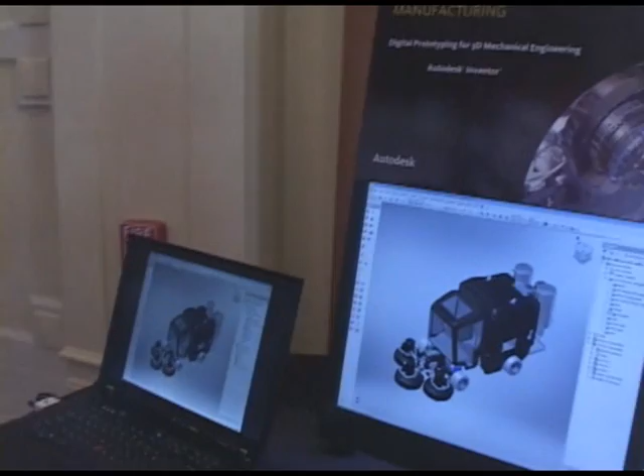Hi, my name's Garen Gardner, and today we're in San Francisco at the World Press event, and we're going to talk a little bit about Inventor, some of the new enhancements. Three of the main things that I'm talking about today are large assemblies, some of our new sheet metal enhancements, and then also being able to do some additional tools with our Drawing Manager tools.

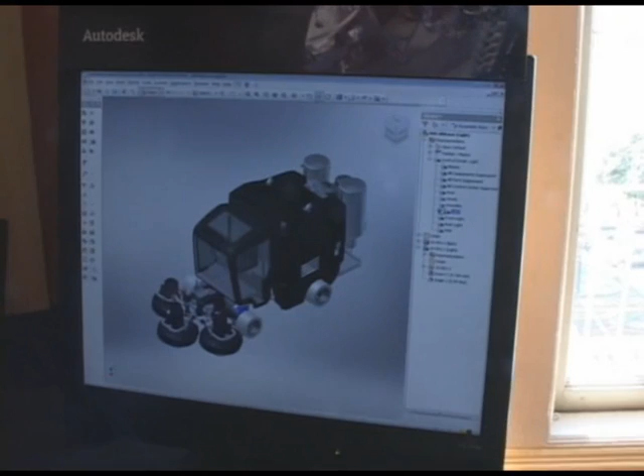So let's take a look at some of the large assembly capabilities. You'll notice first off that we're loading up an assembly that has about 340 components. However, we can lighten this up quite a bit. If we just want to load it up, we want to take a look at what the design looks like, but maybe we don't want to dynamically load every component in my assembly.

Well, in this case, I can substitute a lot of these components for one or two particular components. So you'll notice that I basically have broken each of these down to a couple of different components, and now I only have four parts in my assembly. So this allows us to really create huge assemblies and be able to take advantage of a lot of the power behind Inventor. Now you may wonder how we're able to accomplish some of these things.

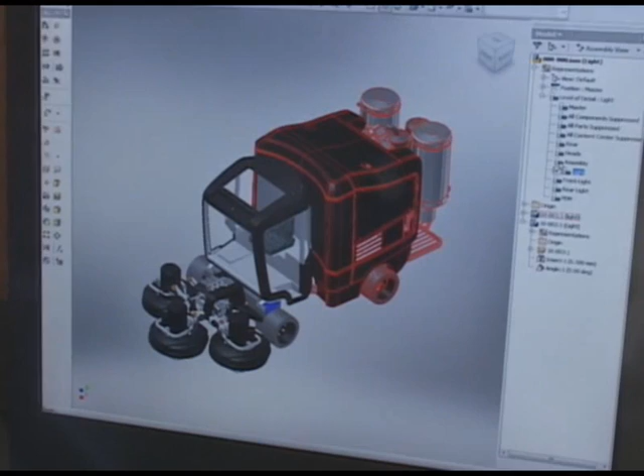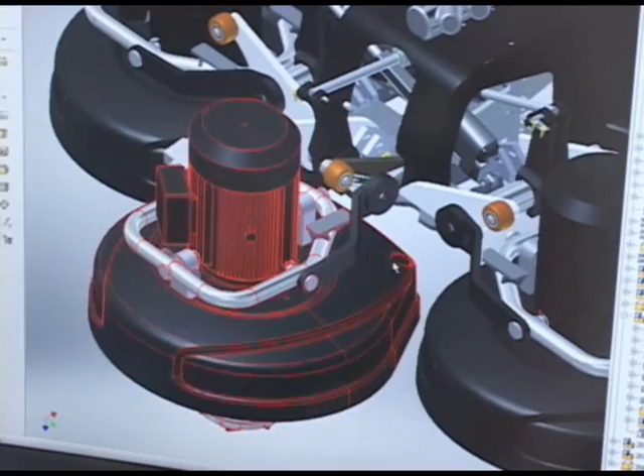The first thing that we'll do, we'll take a look at the front polishing heads, and we want to be able to simplify those. So we'll actually grab that front assembly and take a look at it. Now this particular front assembly has about 218 components in it, and we want to drop it down to about half the amount of components. So let's just open it up in its own window. You'll notice that we have each of these polishing heads, and these are really the area that we want to simplify or reduce some of the overhead.

So with this particular component, I can simply come in, create a new substitute. Now I have a couple of different options. I can create a new part manually and swap it in, or I can let the system help me out and simplify this particular design. So you'll notice as I'm doing this down at the bottom, we've removed 32 components down to one, and this being an occurrence of 3, we can actually remove about 100 components in my assembly just by making a real quick substitute for this part.

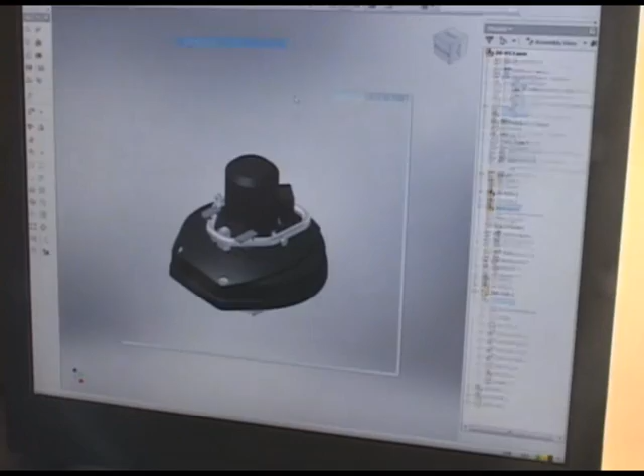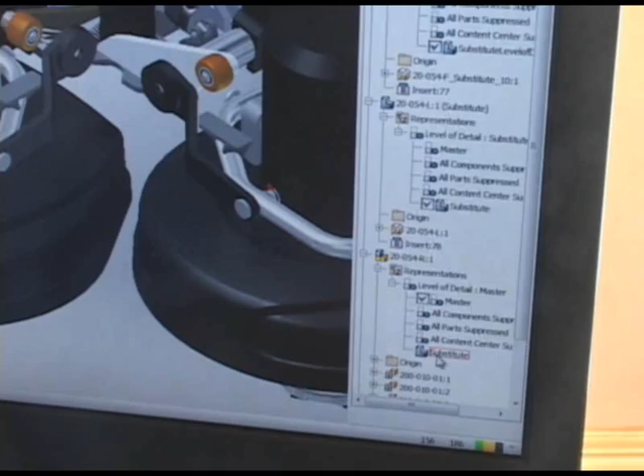Now from a high level, it doesn't really change my design at all. I still have the same weight, the same information in my assembly, but I'm able to easily load up this assembly with a lighter weight representation. So you'll notice as I dynamically remove some of this from memory, we'll see it go down to 188 components from 218, and then we'll just do the same thing on each of the other occurrences. You can see it drop down to 156, and then finally with our third one, we'll drop down to about 124. So we started out with 218 components, we're down to 124.

So you can imagine opening this up with half the amount of the components, we can do a lot more with it. And imagine this on a grand scale, maybe a shop floor that has hundreds of machines. You're trying to see how they all work together. You could substitute each of the machines and really lighten it up.

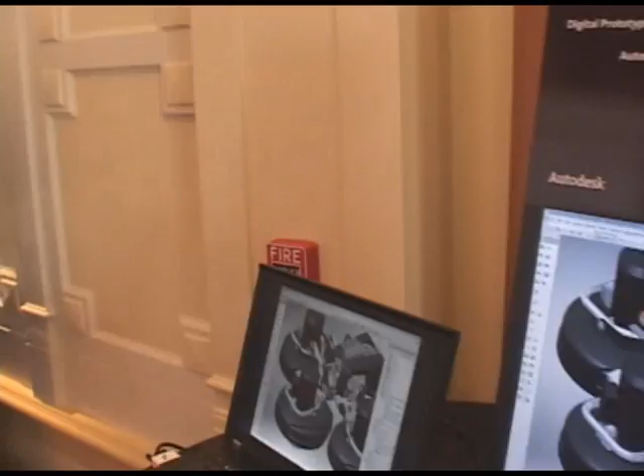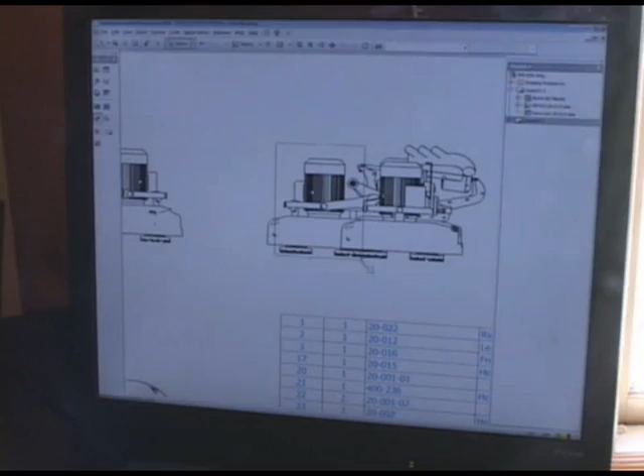So one of the other areas that we've added some nice enhancements is the ability in the Drawing Manager to really create more complex, detailed drawings. And many of our customers are wanting to be able to simplify. They've wanted to take something like this particular view and crop out some of the information. So you'll notice that we have a crop tool, and I can just window around the area of information that I want to keep and have it crop everything else out that I'm not really that interested in.

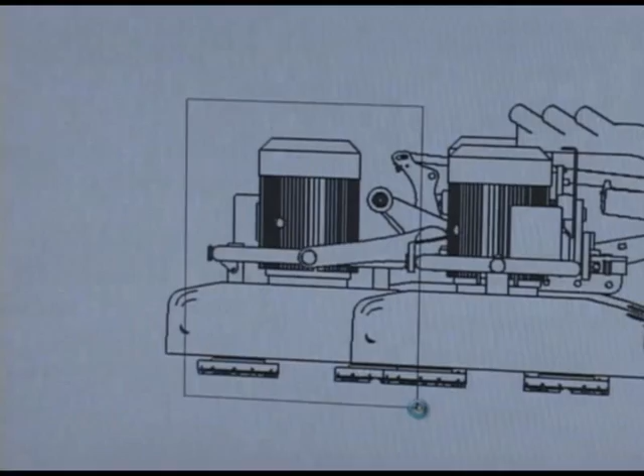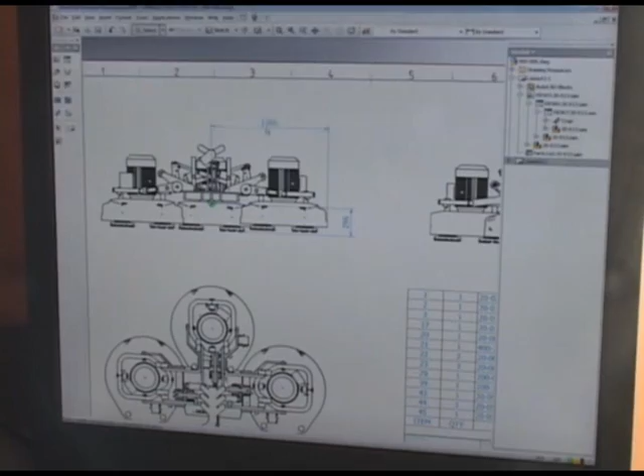I also may want to see what the center of gravity of this particular design is. So oftentimes you want to be able to create various center of gravity points and dimension to them. So one of the things that we did in Inventor 2009 is added the ability to turn on a center of gravity. So not only can we see this in the actual 3D model, but we can dimension to it in the 2D drawing. This is completely associative, so as my 3D model changes, it'll update my dimensions, telling me where the center of gravity is for this particular component.

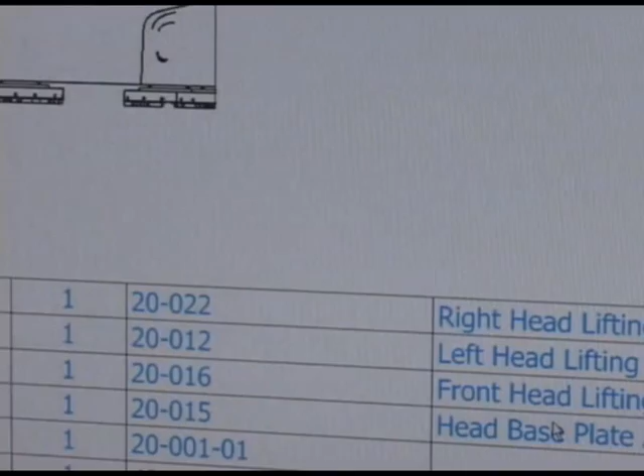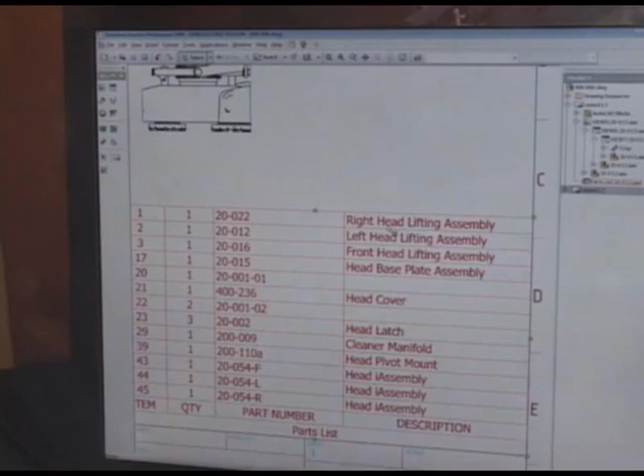And then finally, one of the other enhancements that we have in the drawing environment is being able to really clean up your parts list based on how you want it to look. Many of our customers used AutoCAD in the past to do a lot of their parts list, and it was a very manual, laborious process. Through Inventor, this is a much faster process. However, it's oftentimes necessary to really simplify or clean up what's in the parts list for any given view.

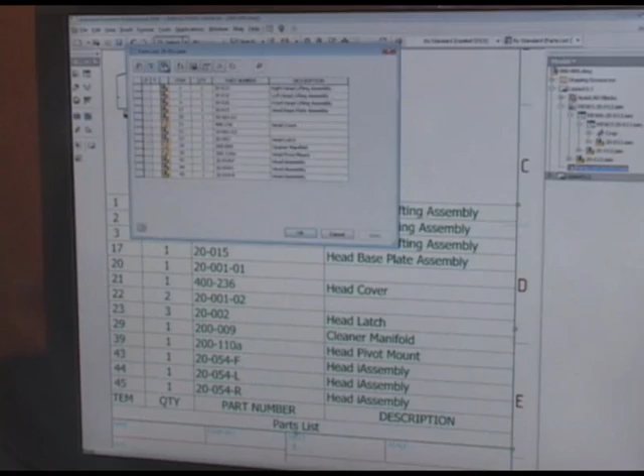In this case, we can go into some of our filtering tools, and we can just tell it that we don't necessarily want to see any standard parts, so these would be nuts, bolts, or washers in my parts list. We may want to put that off on another sheet shortly. And we also want to only see various components that are in my working components. So these are all the actuators and all the working components of my design. And we're going to add those.

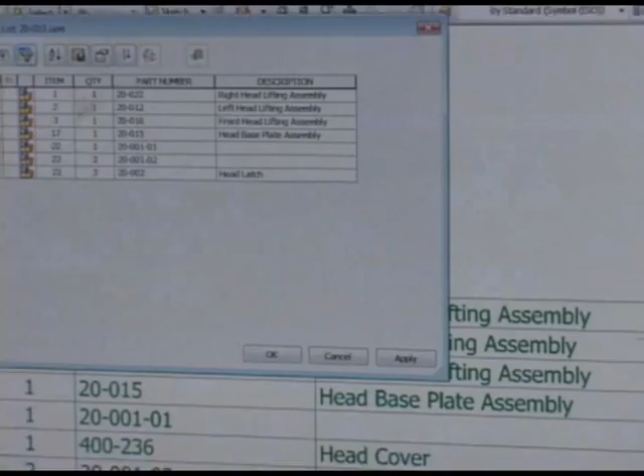So I can have multiple things go into my filter. You'll notice that it drops down my parts list by about half. So I'm really able to easily filter out the components that I only want in my design and be able to really simplify this particular design.